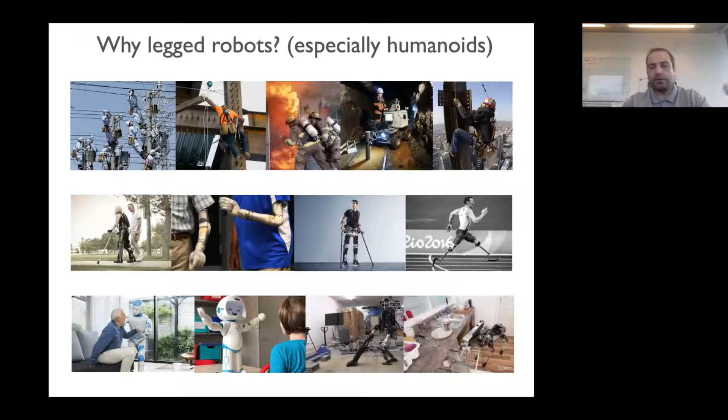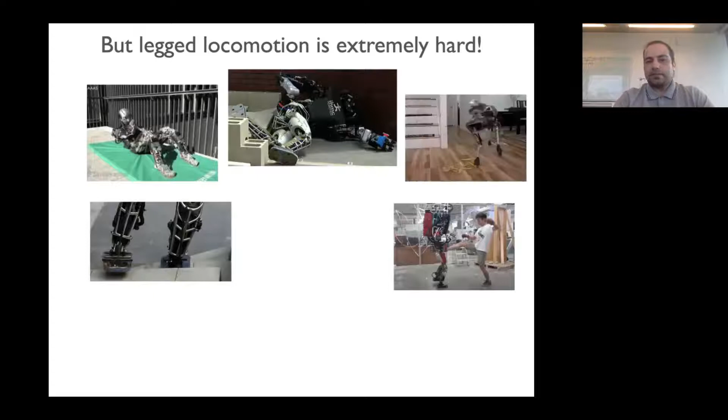The problem is that legged locomotion is extremely hard. First of all, because these robots can make and break contact with different parts of the body, and this renders the control problem very complicated and high dimensional. These robots are inherently unstable, meaning that if they are not controlled properly, they can easily fall down. They have state-based and time-based switches that are essential for these robots to move around, so they need to make and break contact such that they can move their center of mass around. They are prone to external disturbances, environmental uncertainties, perception uncertainties, and so on.

And finally, the amount of interaction forces can be highly limited, so it needs to be properly controlled such that these robots can move around. There are many sensors and actuators in the structure of these robots that should be working simultaneously just so they can do a simple job like standing. So this problem, the control of legged robots, is generally very hard to solve.

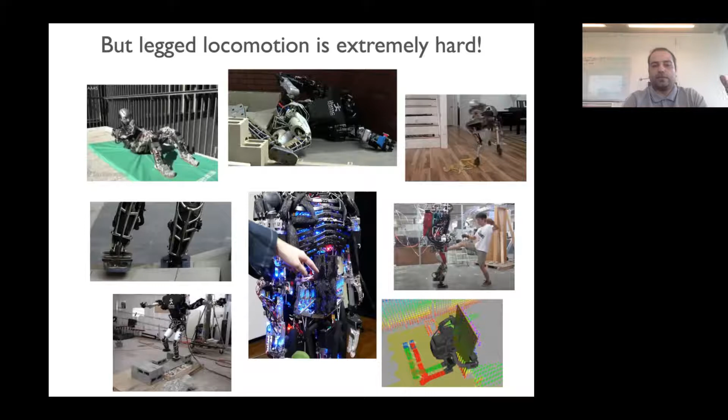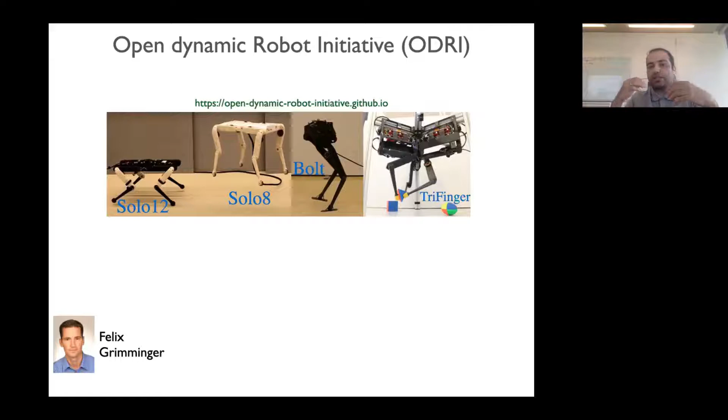Before I jump into the theory, I would like to say that all the demos I'm going to show use the robots from the Open Dynamic Robot Initiative, designed by Felix Grimminger in our lab. We have two quadrupeds, Solo 8 and Solo 12. We have one biped, and we have a three-finger manipulator for dexterous manipulation. They all have a similar design concept based on proprioceptive actuation, and they are torque controlled.

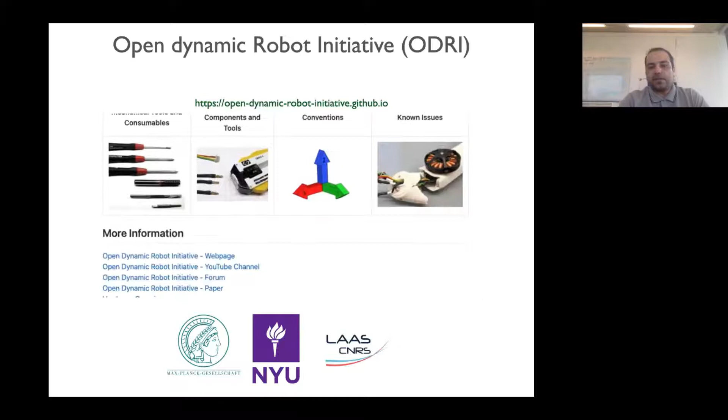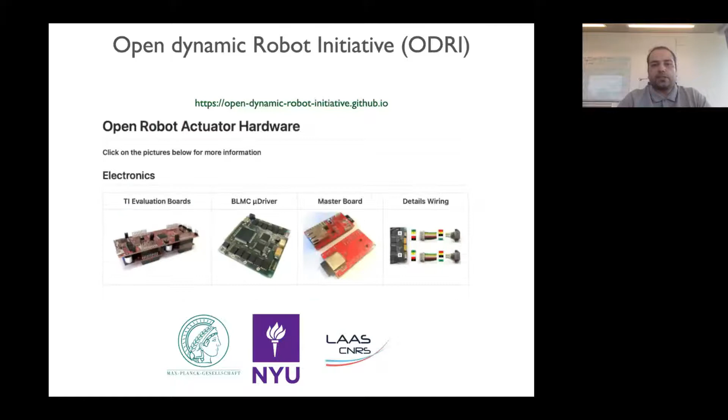So here is the ODRI web page, you can look it up. You can see the open source hardware design and all the components. All of them are based on 3D printed material and off-the-shelf components. So anybody can go there, look at them, and if universities or other institutes are interested, they can just start building their own robots.

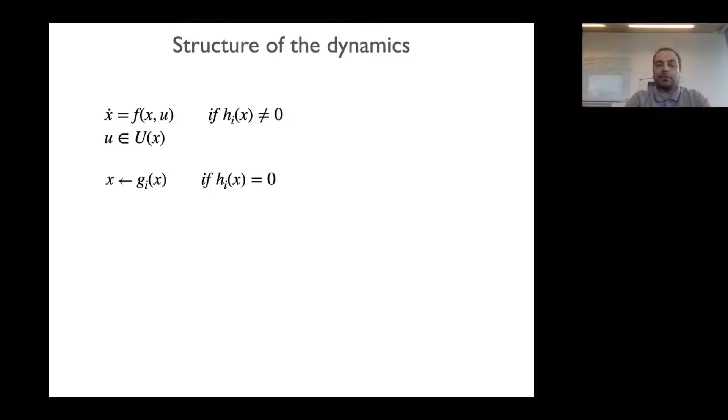So now let's jump into the theory a bit. If we look at the structure of the dynamics of this robot, we can see that there is a continuous part of the dynamics, meaning that as long as these robots do not go to a switching surface, they have simple ODE equations, and the control input, U, is highly limited—it should be inside a set. But as soon as they go to a switching surface, the dynamics changes, and they can have a jump in the states if there is an impact. So the whole dynamics is a hybrid dynamical system.

If we look at the continuous part of the dynamics, we can split it into two parts. One part is the actuated part, meaning that we can exert torque in the joint such that we apply forces to the environment. And using these forces, based on the unactuated part of the dynamics, we can move the center of mass around.

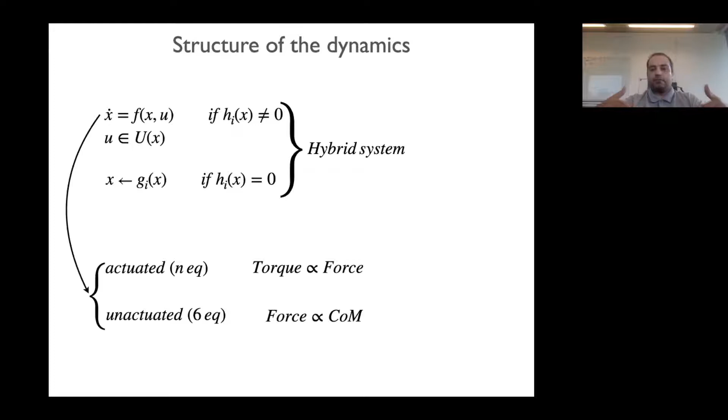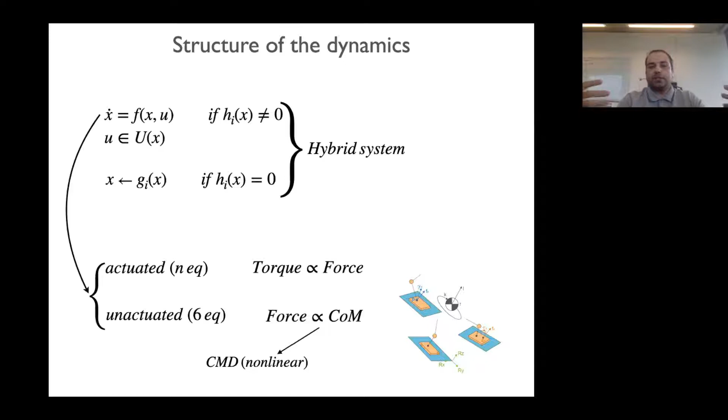So the second part is more interesting and needs enough care for controlling these robots. These dynamics can be captured using centroidal momentum dynamics, which says in order to move the center of mass or change the angular momentum, you need to exert external forces. This dynamics, however, is in general nonlinear, which means that if you want to use this to do optimization, it's going to be a non-convex nonlinear optimization problem.

But there are some abstractions of these dynamics. For instance, LIPM, which says if you limit the motion of the center of mass to a certain height, and the rate of angular momentum around the center of mass is zero, then you can end up having linear dynamics, which is very nice because we know how to control linear systems.

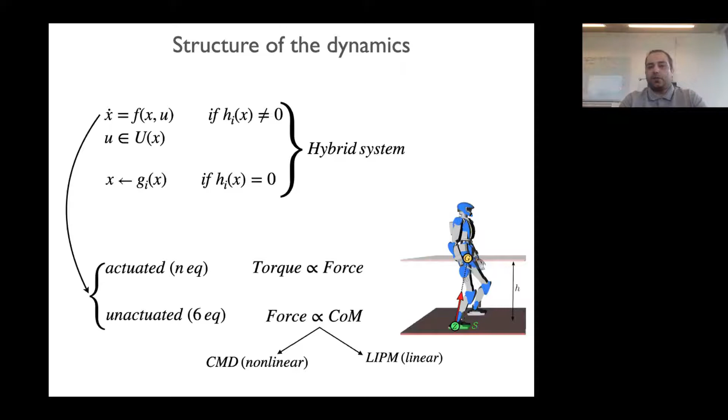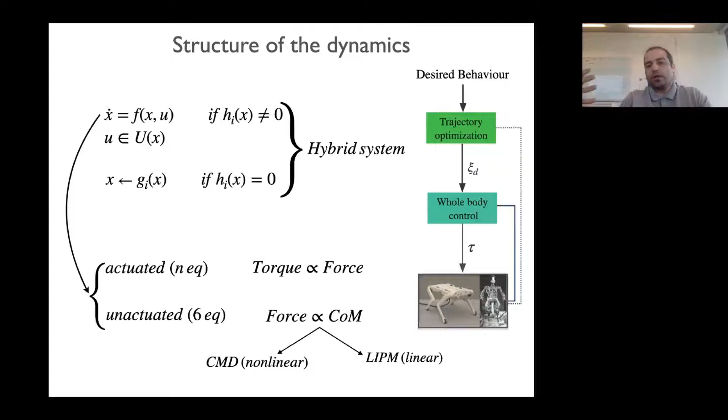This is a kind of block diagram of the control system that we normally use. We are given a desired behavior, for instance, for walking it's the desired walking velocity. We do trajectory optimization to optimize trajectory for the most important points of the system, like the center of mass or the end effectors. If we can solve it very fast and close the loop, we can do it in a closed-loop MPC fashion. Then we have a whole body controller that maps these trajectories to the full joint torques. So this is the normal control framework that we use.

The first question I would like to talk about is how to control walking of different robots. In this picture, you can see three robots I've been working on during the past five years. On the right is Surena, a fully actuated robot with many degrees of freedom in the leg, all of them actuated. This helps us control the interaction forces directly by modulating torque at the ankle, at the toe, and so on. However, the leg is super bulky, which means it's heavy, and to do dynamic motion you are very limited.

On the left, you can see Bolt, which is a minimally designed robot. It has only three actuators per leg, and the foot is a line that's there only to prevent the robot from rotating around the Z-axis, or normal axis, and the ankle is fully passive. So this robot has a very lightweight leg, meaning you can easily move the legs around, but you cannot directly control the contact forces using the ankle joint, for instance. So controlling this robot becomes more challenging.

In the middle, you can see a trade-off design, Athena. It has a locked ankle, I would say, without any actuation, but it has a prosthetic foot, which gives you a bit of flexibility at the foot. Here, you can modulate the forces or center of pressure inside the support polygon because you have support. However, again, you don't have ankle actuation to control contact forces directly.

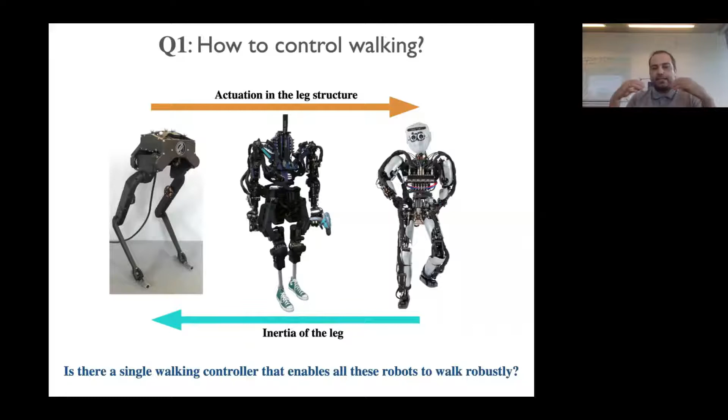The question I would like to answer is whether there is a single walking controller that enables all of these robots to walk robustly. Since we want to control the walking motion, we would resort to using LIPM. However, the main intuition here is that to control all these robots, which have different control authority over the contact forces, we can only control the switching surface. So we can virtually constrain the center of mass to move on a surface. The continuous part of the control will be handled by, for instance, trying to have the center of mass moving on a constant height and trying to have zero angular momentum around the center of mass.

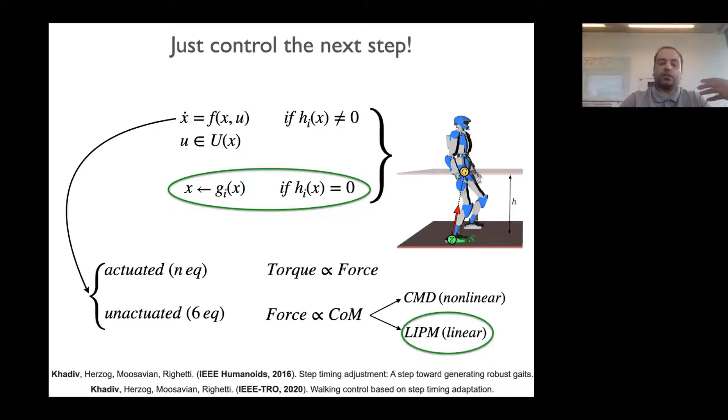And then the only thing you can control are step location and time. So based on that, you want to control the walking of this robot. This is a general strategy that doesn't depend on the type of ankle joint or the type of foot you have. At a high level: very fast, we can find the next step location and timing using integration of the current state of the system up to the end of the step. Then we can write down a convex optimization problem such that we select the optimal step location and timing given the current state.

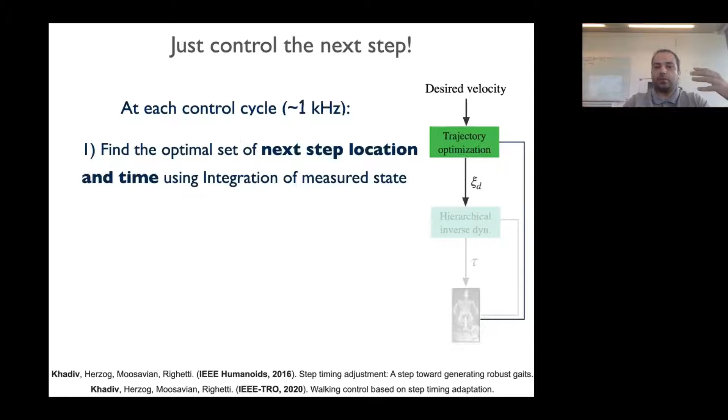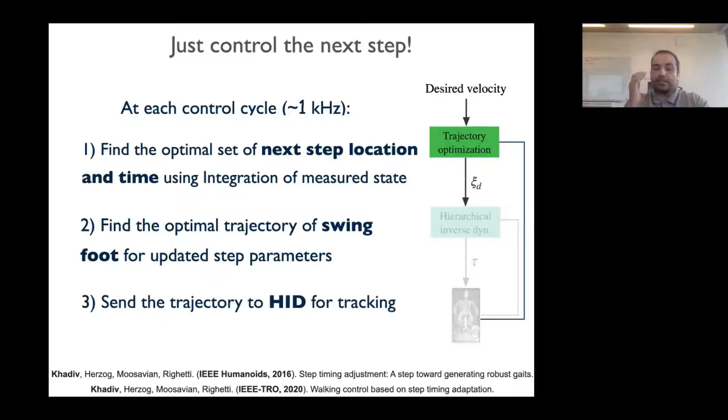Then we can find a proper swing foot trajectory for the updated step from the next step. Finally, we can send these trajectories to a hierarchical inverse dynamics controller to track them.

A couple of years ago, I implemented this in simulation. Here is the simulation of Athena, which doesn't have actuation in the ankle. However, by only adapting step location and timing, we are able to control this robot very robustly. The robot is robust against external pushes and against slippage.

It can recover from these disturbances. We also showed that timing adaptation is quite important for humanoid robots. In this figure, we show the amount of push the robot could recover from in different directions. Green is our work with timing adaptation. Blue is an LIPM-based MPC with only step location adaptation, without step timing adaptation. You can see that by adapting the timing, you can greatly improve the robustness of the gait with respect to external disturbances.

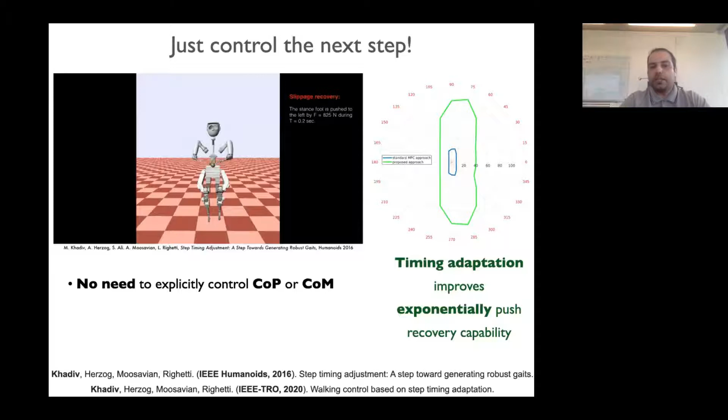So the main idea is that we don't need to control the center of pressure, or the center of mass horizontal component. The only thing we do is adapt the step location and timing such that we have a desired gait, and we can resist external disturbances. We also showed that with this simple strategy, we can guarantee viability, a weak forward invariance, by only looking ahead to the next switching surface, which is the next step.

Finally, we can do very fast replanning with both step location and timing adaptation. So the main idea is that we forego controlling the continuous part of the dynamics, and resort only to adapting the switching surface, the step location and timing, to control the walking of the robot.

Recently we have improved this strategy. This is the work of Elham, where we added the swing foot dynamics. I'm not going to go into detail here, since this will be presented next week at ICRA, so you can watch her talk.

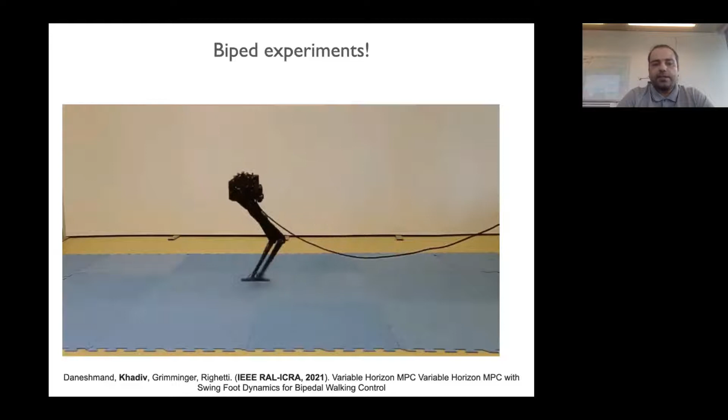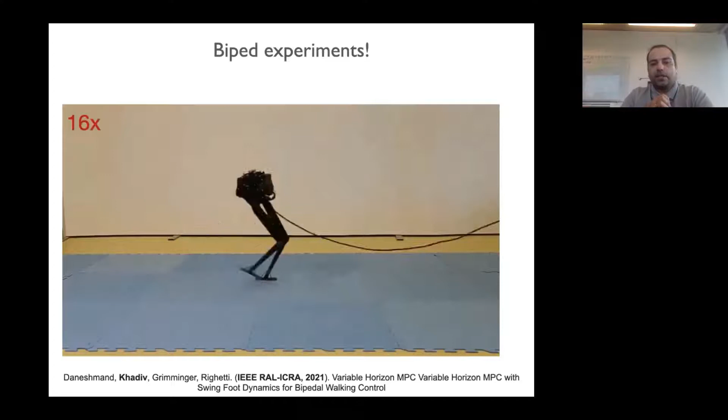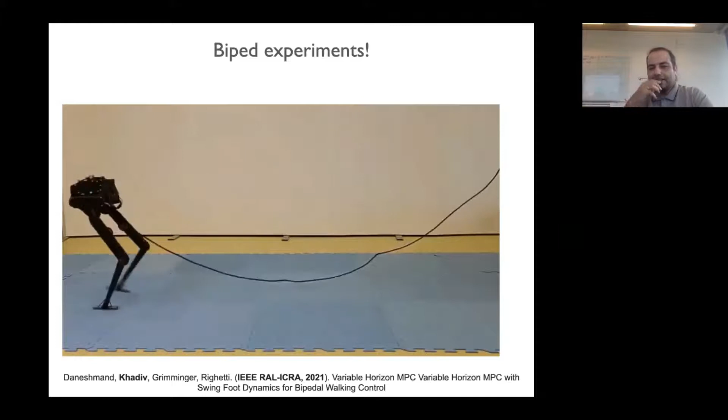But here are the experiments we did. This is walking both forward and backward in this video, and again, there is no control of the horizontal motion of the center of mass. We are only adapting step location and timing to control the walking and deal with disturbances and uncertainties. Here, the weight of the wire is not negligible, and sometimes I'm perturbing the robot, but it's adapting its parameters to recover from these disturbances.

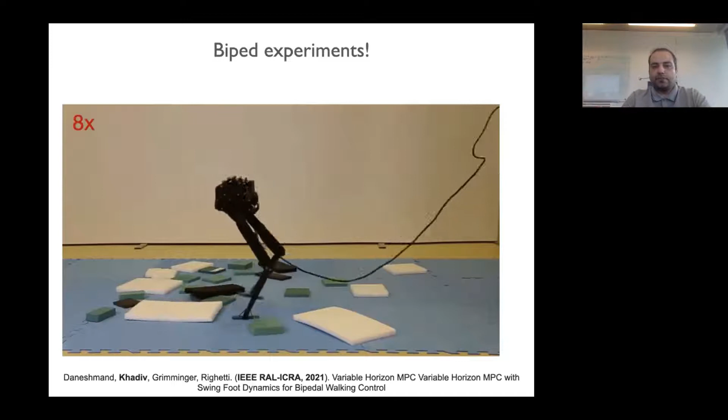Here is another experiment on uneven terrain. The robot, or rather the controller, doesn't know at all about the unevenness of the terrain. However, because of the torque control and compliance of the system, and also adapting step location and timing, it's able to recover from all these uncertainties and environmental disturbances.

We also tested the algorithm on soft terrain. Again, in the controller, we assume that the environment is rigid. However, thanks to the robustness of the control, the robot is able to walk on soft terrain.

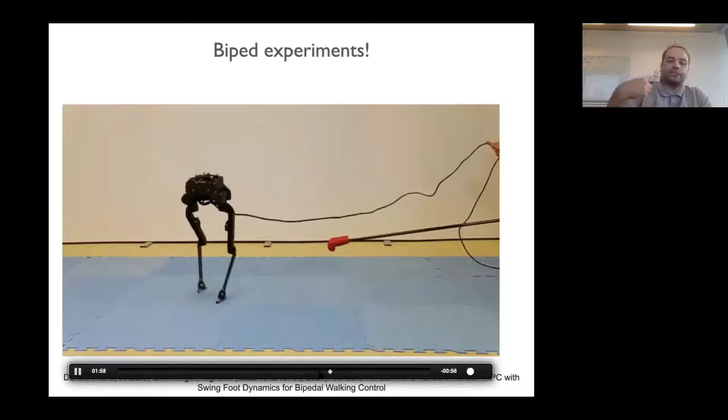We did a lot of push recovery experiments, with the robot stepping in place. It's pushed in different directions, and it's adapting its steps to recover from the push. The nice thing is that it doesn't only adapt the next step, but it can adapt several steps to recover from huge pushes.

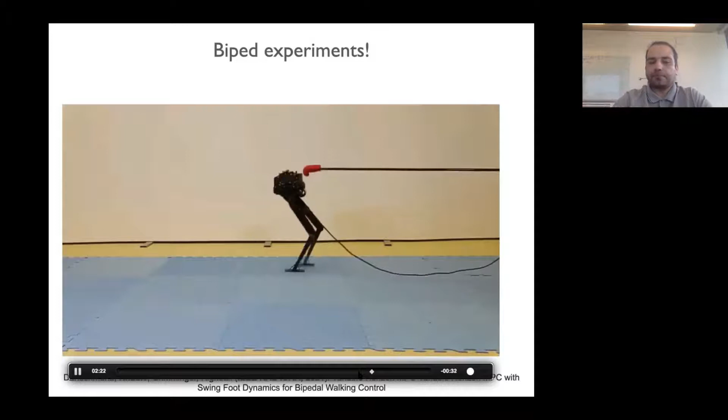We also did some sagittal pushes, here you can see. Finally, the interesting part for me especially is the slippage recovery. The robot is walking on a moving platform, and thanks to adapting step location and timing, it's able to recover from all the disturbances caused by this moving platform.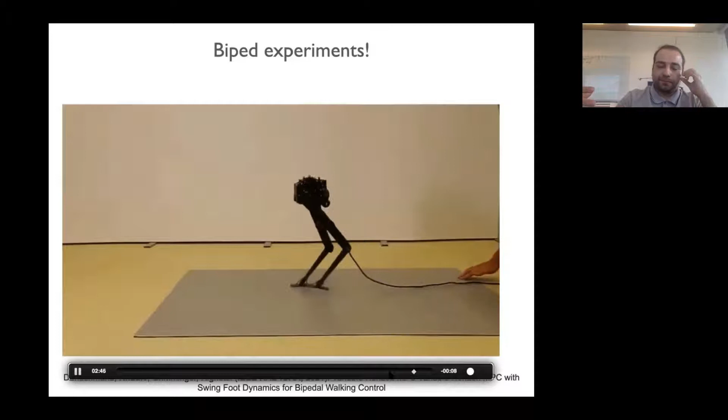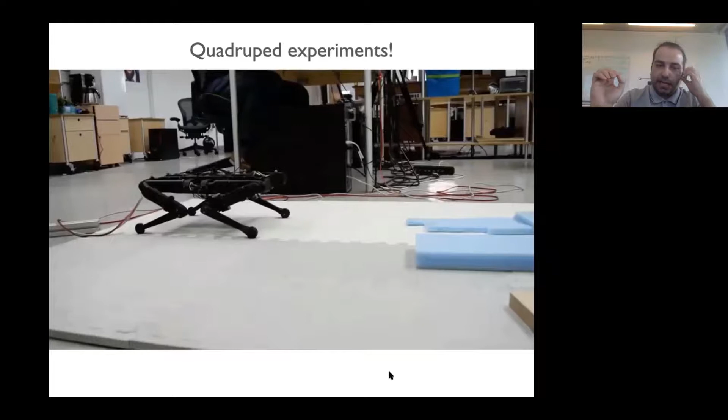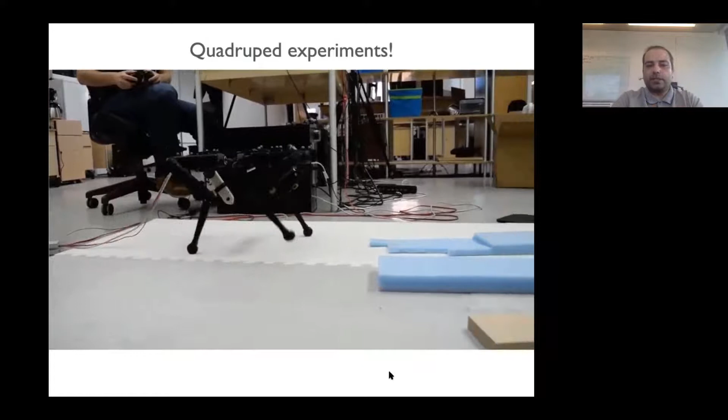Julian, a PhD student in our group, adapted the same walking controller with some minor changes to control a quadruped robot's locomotion. Here he has access to a joystick and is moving the robot around. The environment again has some uncertainties, and the robot is able to walk properly despite them.

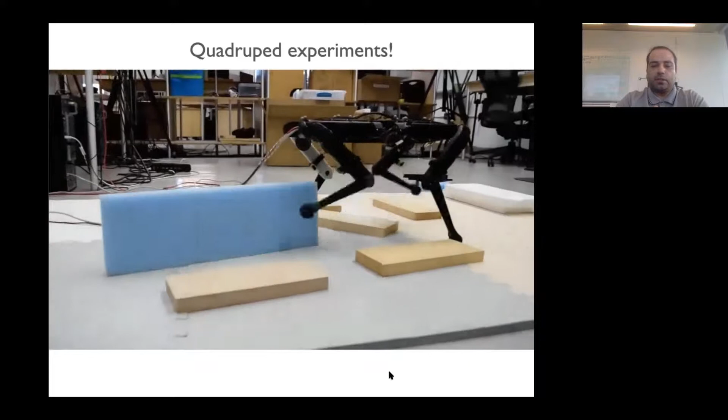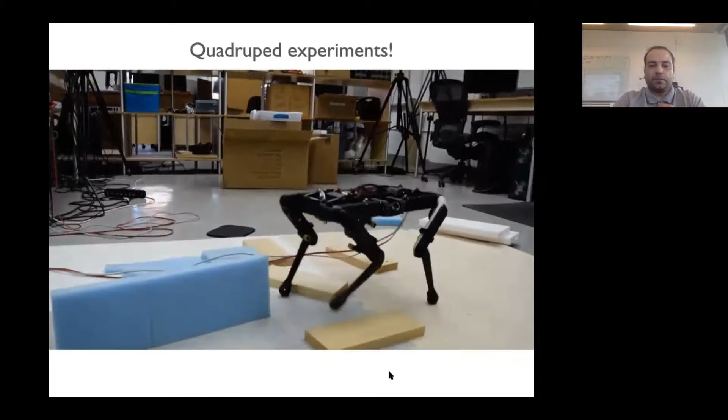Here, because we have a quadruped, we can also rotate around. I'll go a bit forward - here is some push recovery he did.

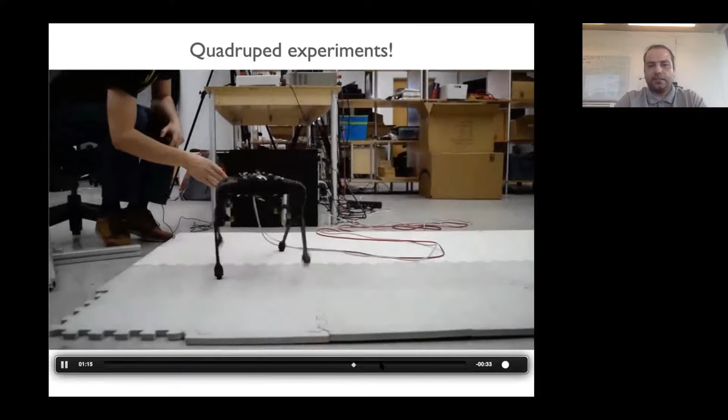Okay, so those were the work based on the step location timing adjustment.

Robust MPC can also do it, however this comes at a higher cost. So MPC is very efficient but sometimes violates the constraint. Robust MPC is very conservative but doesn't collide with the environment. SMPC is a trade-off between these two.

So Ahmad is going to present this work at Humanoids. If you're interested, you can watch his talk in two months, I would say.

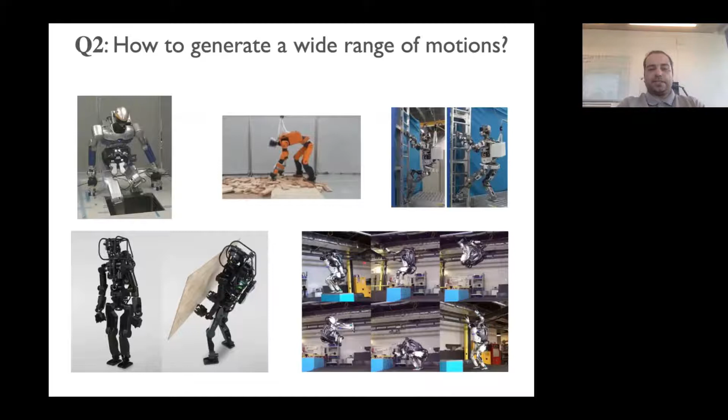Okay, so now how about if we want more complicated motion than walking? For instance, if the robot wants to do a backflip. Here we cannot use LIPM anymore because the center of mass is not constrained to move on a flat surface. So we need to accept the nonlinearity and solve the general problem.

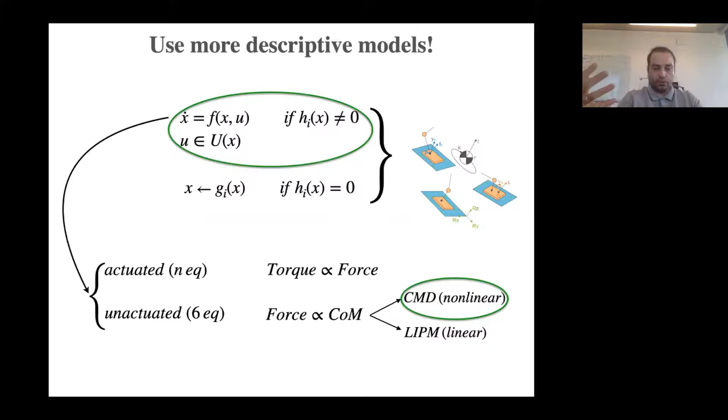Centroidal momentum dynamics. We cannot just adapt the switching surfaces anymore; we need to carefully control the contact forces such that they realize the desired motion.

So here is the centroidal dynamics trajectory optimization that we have. In the cost, we would like to track a desired momentum and desired trajectory of the center of mass. The main constraint is the centroidal momentum dynamics, which is non-convex. We also have a second order friction cone constraint and some others. So this is a non-convex nonlinear optimization problem.

And thanks to the solver Brahayam developed in our lab, we can efficiently solve this problem using a sequence of convex approximations of the centroidal dynamics.

Once we have a trajectory for the centroidal dynamics, we can do whole body inverse dynamics and inverse kinematics around these trajectories, applying the constraints we have, and iterate between these two solvers so they come to a consensus in terms of momentum. Once this consensus is made, we can ensure we satisfy force constraints via centroidal dynamics, and whole body constraints using whole body inverse kinematics and inverse dynamics.

So this is the solver, basically Alex and Brahayam have been developing in our lab. And then I started using this solver and implementing some motion from it on the robot.

So this is the Solo 8 robot. The first thing I did, what I'm going to show now, is only trajectory optimization—there is no MPC. We generate the full trajectory, and then we have a low-level controller, a task space impedance control, to stabilize the system around the trajectory.

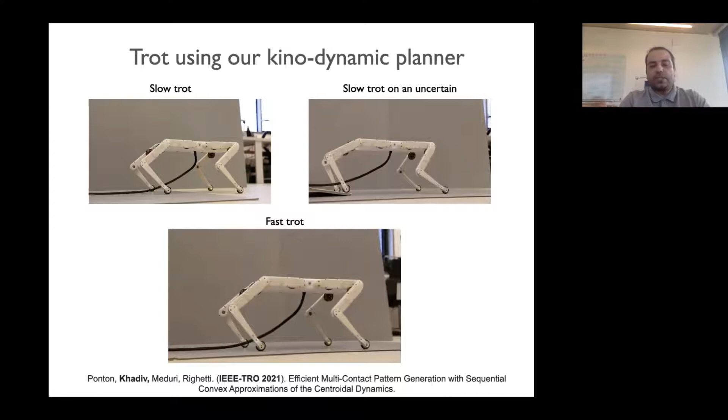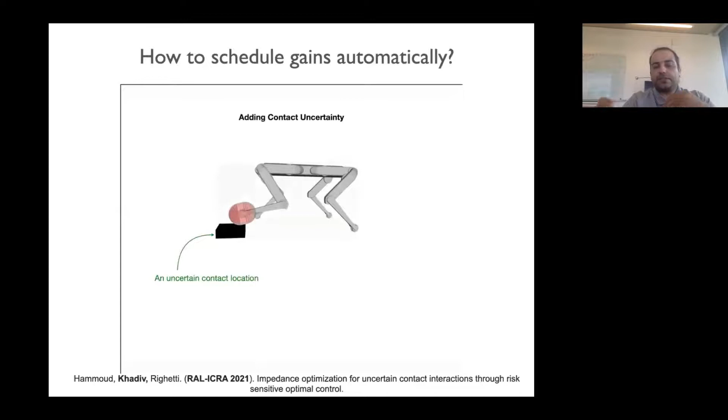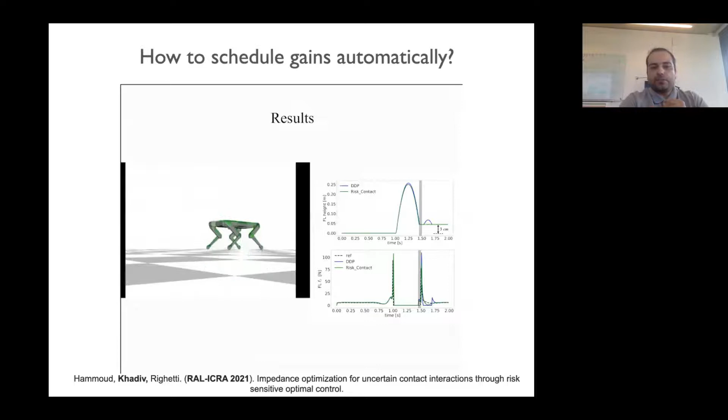But if you want to do this systematically, this is new work that Bilal did, and it's very interesting. You can use risk-sensitive optimal control with measurement uncertainty, and consider contact uncertainty, to get a jumping motion with a proper set of optimal gains that stabilizes the system. If you're interested, he's going to present his work next week at ICRA.

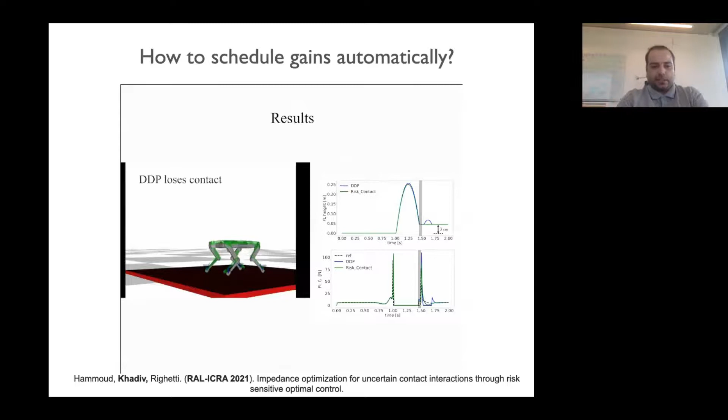I also did some other motions. Here is a combination of quasi-static motions and then a very dynamic motion. Again, it's only a predefined trajectory and a local controller around this trajectory.

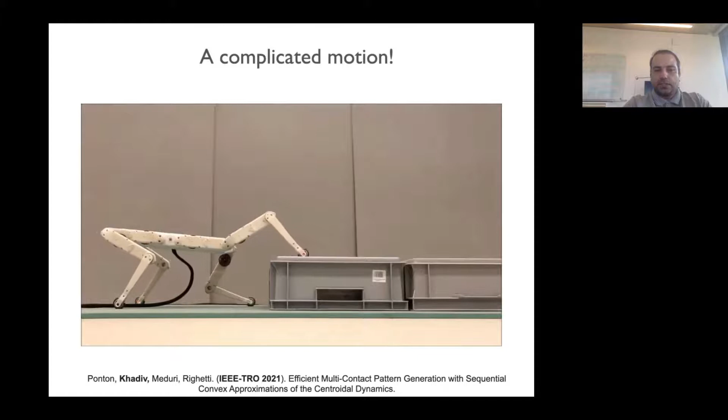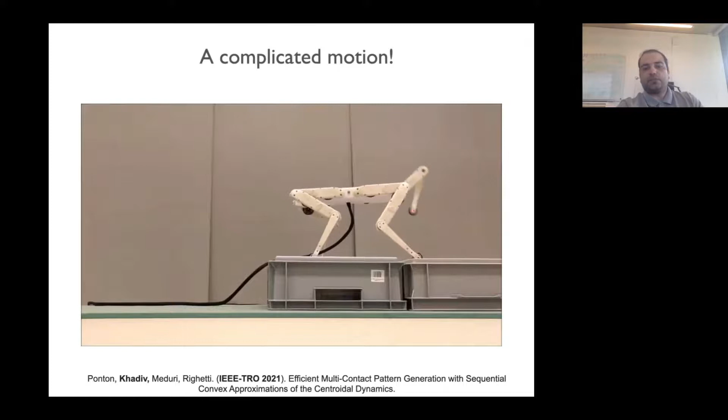This is another view of the same motion. Here we also use the capability of the robot by rotating the hip one full turn, which could be very useful for climbing obstacles.

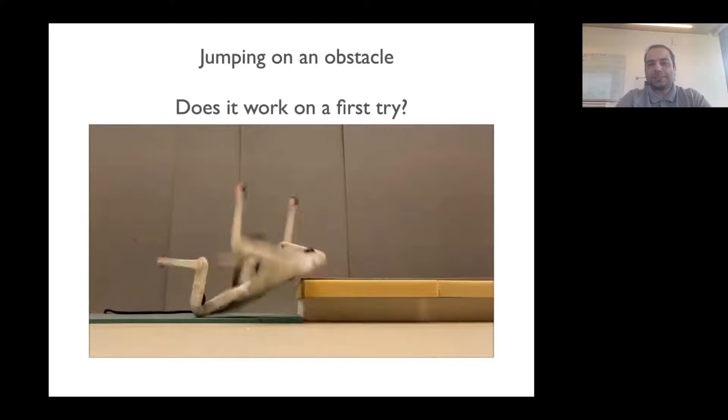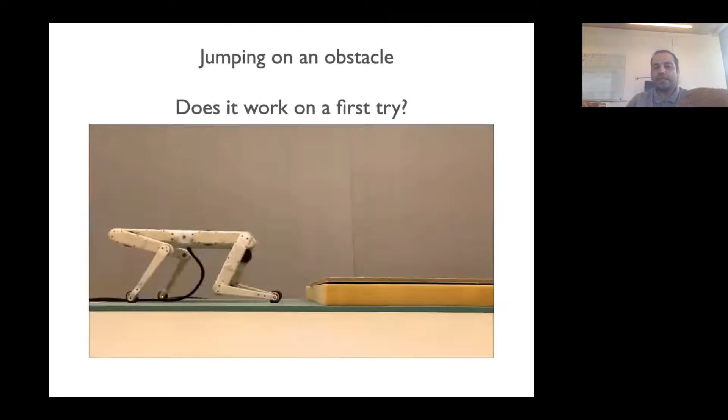The thing is we all know these motions don't work on the first try. So what I would do is sit there, generate a motion, run it on the robot, and then look at the data and the video of the motion. Then I'd decide to change some parameter, which could be a regularization term in the trajectory or some feedback gains. At some point, I'd have some motions that are working, but each with a different kind of performance.

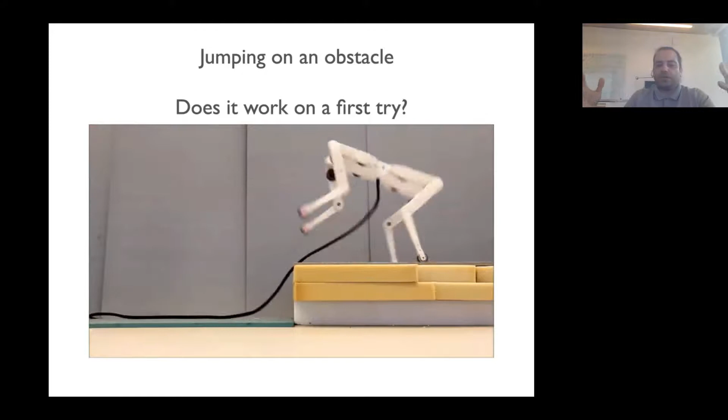So here, after only 1 day of trial on this robot, the idea was that we wanted to jump on an obstacle with the same height as the robot. We needed to do a lot of trial and error to achieve that.

The third question I'd like to answer is related to this: how could we use this data? How could we make this procedure, which I'm doing manually, automatic? This is other work we did with Muhammad, a master's student in our group.

The idea is that we have a normal control pipeline with a planner and a controller. We close the loop using Bayesian optimization because we don't have so many parameters to decide. Bayesian optimization tries to find the optimal cost weights of the high-level planner such that we have a robust motion.

For instance, for walking motion, if we look at the cost function, we can write a performance term, like a velocity tracking term in different directions. We have a robustness term; for walking, we can have the ZMP as close as possible to the center of the foot or center of the support polygon, so it's kind of a robustness term. The third term is that step locations should be as far as possible from the boundaries of the reachable area. Finally, we need a terminal cost that tries to guarantee or bring the system towards some invariance. Then we have a set of constraints, inequality and equality.

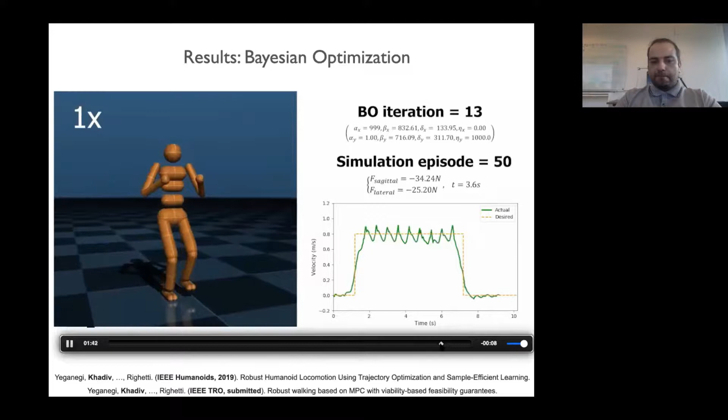Here is the history of the search by Bayesian optimization. For instance, you can see that after around 13 iterations, it could already find a very good solution, and the rest of the exploration didn't really help so much. This gives us the intuition that if we do this on the robot, maybe after a certain number of iterations we can find a robust motion that achieves the performance we would like.

The other approach we used with Miroslav, another PhD student in our lab, is to use deep reinforcement learning for controlling legged locomotion. Here we have a simple hopper. The idea is that we would like to jump as high as possible, and we compare two different policies: one that outputs only the desired position of the PD controller with a fixed PD gain, and the other that outputs both the desired target for the PD and the gains, or impedances.

You can see that both can manage to handle different amounts of height uncertainty in the environment, which is really hard in general to handle with trajectory optimization, because this is a very hard problem for contact timing and contact location uncertainty. You can see the robot seamlessly perform with different disturbances, and we showed that with variable impedance we can have better performance in general.

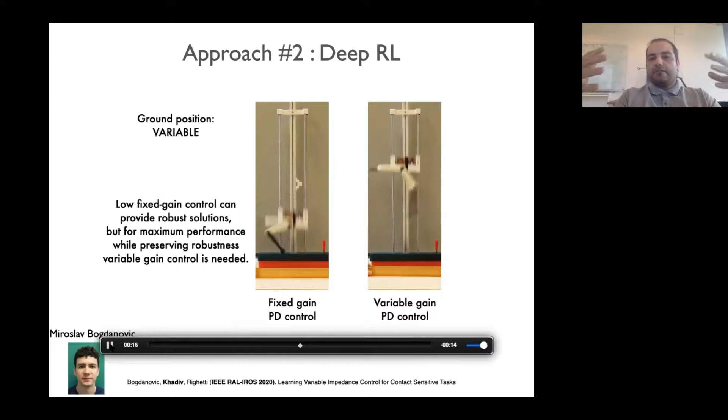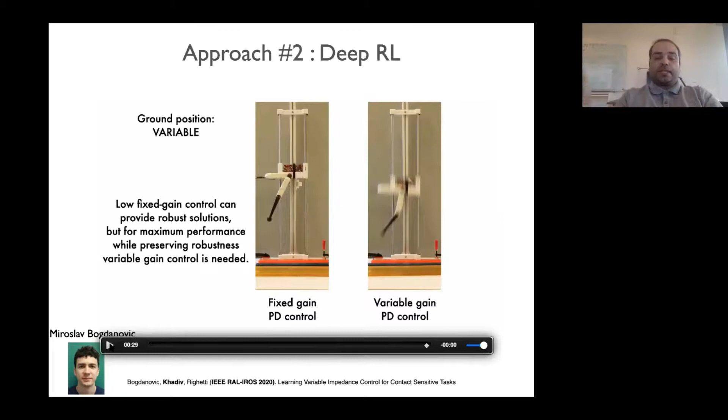Here the motions we generated were from scratch, because the system is low dimensional. So for DeepRL we used DDPG here, and it could explore and find a solution to do this task. However, for higher dimensional systems, I believe this is not possible. For instance, if you want to do this on the quadruped, we need either an imitation or a demonstration or something.

So in a new work, what we did is generate full body trajectories using trajectory optimization. Then we try to cache the solution of the trajectory optimization into a state-based neural network, while we have different types of contact uncertainty in the simulation. This ends up with a policy that is robust to the contact uncertainty.

Then in stage two, we try to add only the task reward and some regularization such that we can transfer these motions onto the robot. The output of this stage is just a policy that we can run directly on the robot, without doing any more optimization or training on the robot.

So I'm very excited about this work, to see how we can extend it for more and more different tasks and for a general problem. So the policy is really robust to different types of contact uncertainty and also external pushes. And it was really hard for us to tackle this problem of contact timing uncertainty with trajectory optimization.

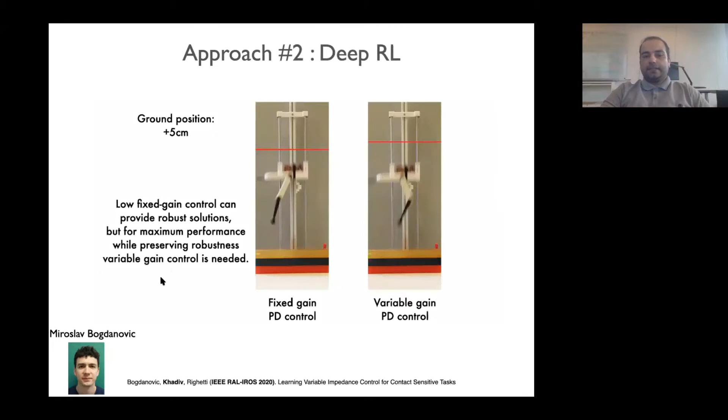However, the variable gain gave us a bit better performance. Here, the robot could jump, for instance, 10 centimeters higher for all the different uncertainties that we had. So we compared these two in terms of performance, and variable impedance worked better.